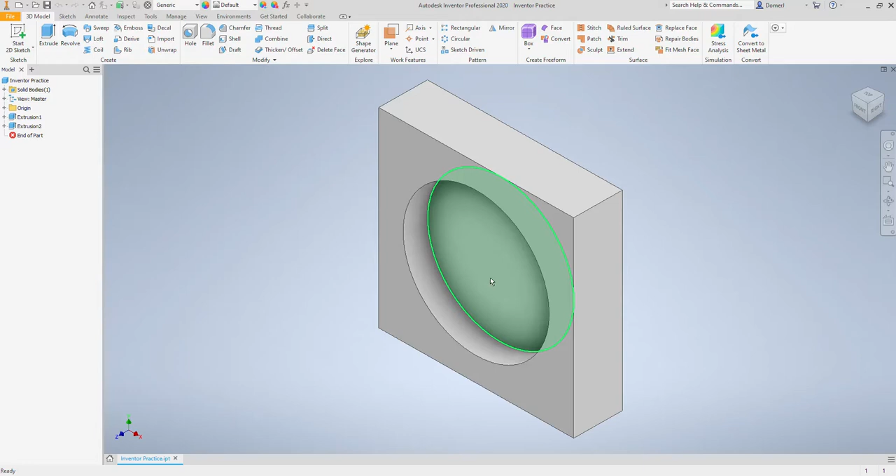Welcome back. Well, we're going to expand on our previous Autodesk Inventor introductory video, and in this video we are now going to draw the support file. So you can see up on my screen we've got the previous video's practice part. I went and renamed it Inventor Practice because obviously that was not the support. In the last video I saved it as support.

So once Inventor's open, whether you're continuing on or you're starting fresh, you want to get back to that Home tab here, and we're going to start a new part file. In here, we're going to draw the support. Well, we've already drawn it once, so this should be fairly easy. The difference, though, is we're going to draw it as a three-dimensional object now instead of its individual views. So we're drawing it like the isometric, but we're just looking at the part.

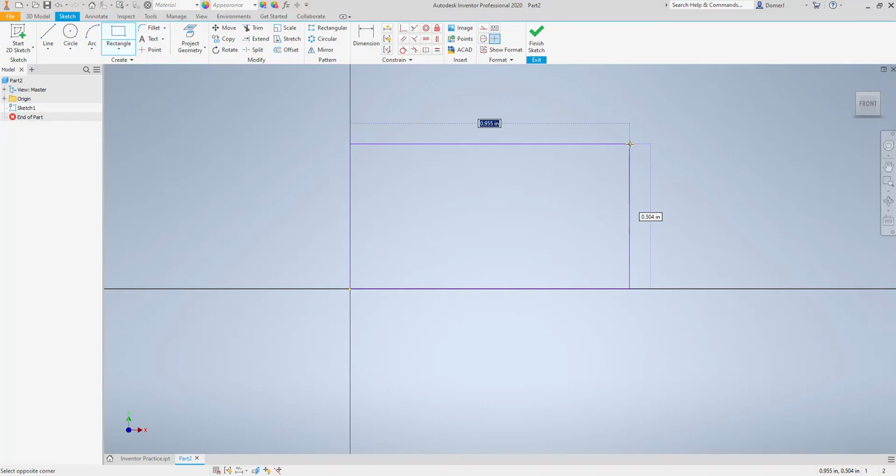So we're going to start a sketch on one of those planes. Again, I usually choose the front view, the XY, or the top view, XZ. I'm going to start by just drawing the block. I'm not going to try to draw all the details yet, so I've got a rectangle, and the support is, from the front view, 3 inches long by 1.5 inches tall. I've got the handout in front of me as I'm doing this. Hopefully you've got your handout there as well. And I'm going to extrude this the depth of the right side view of the support, 1.5 inches.

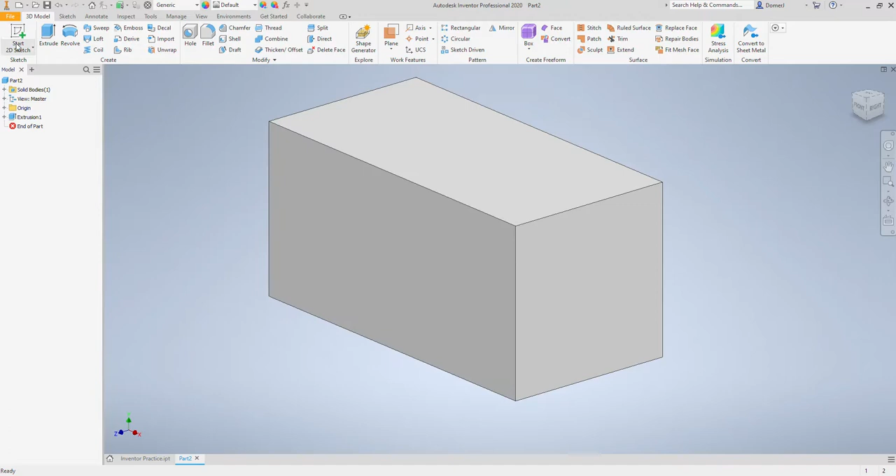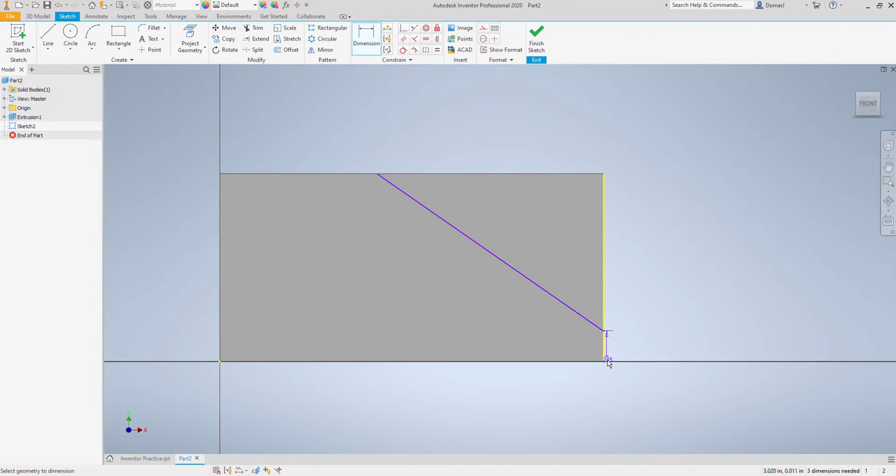So there's our object. I don't want to try to spin it around too much right now because I don't want to get lost in my orientation. This is going to be the front view over here for what I'm doing. So I'm going to go ahead and sketch on that, and I'm going to do my first cut. So I'm going to cut the big angle off. Well, that big angle is a 1/2 inch from there and 3/4 of an inch from the back side. So for right now I'm just drawing a line as long as it's on the object, and I'm going to dimension from this point to the bottom. Should be 0.375, not a 1/2 inch, my bad.

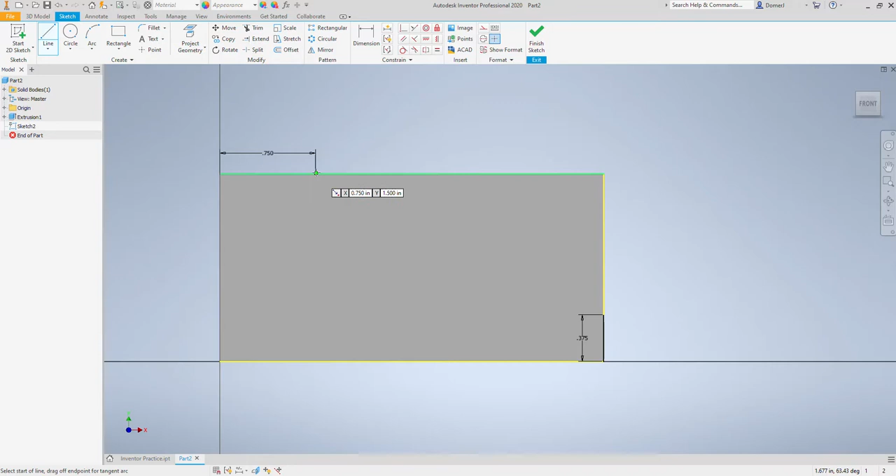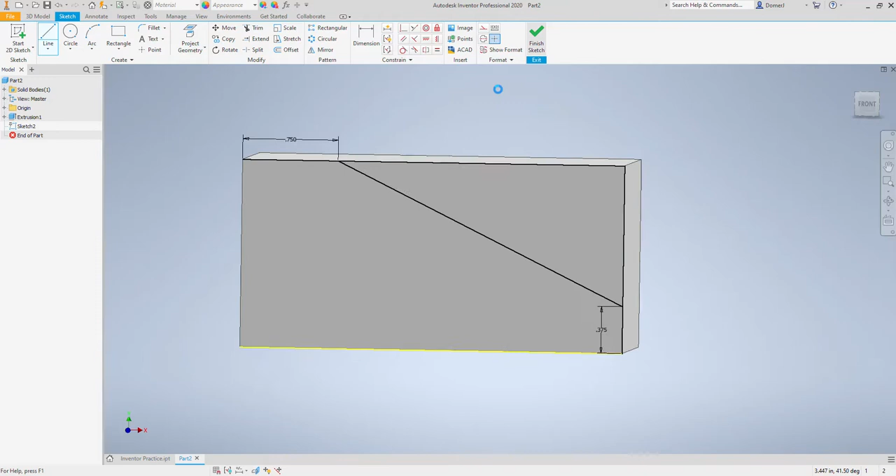And then from this point to here, and let's do this a little bit differently because it moved my line on me. Alright, so we're going to draw a line here, 0.75. Move away. Draw another line here, up 0.375. Now those lines don't move on me, so now I can draw a line connected to those dots, and that is that big angle cut. But in order for us to extrude something away, I want to get rid of this triangle. I have to make it a shape. Well, I can just simply come across here and finish off the triangle so that it is a closed shape. And finish sketch. I'm now going to extrude that shape, cut all. And we start to see that the support is coming together.

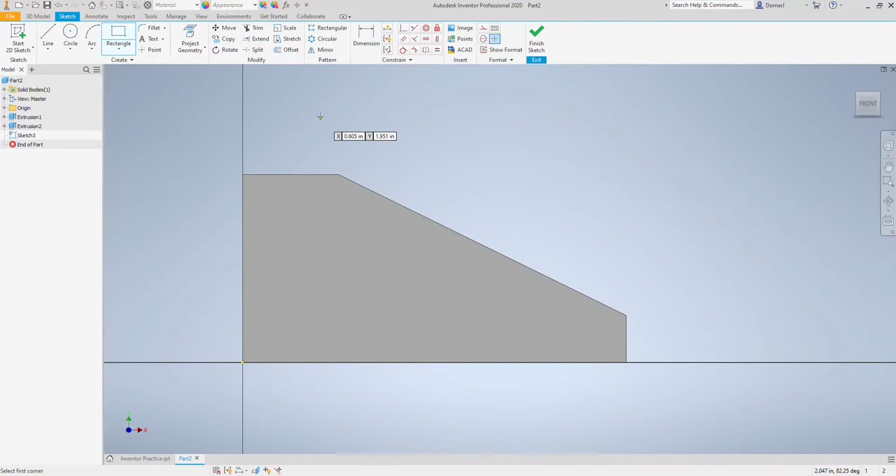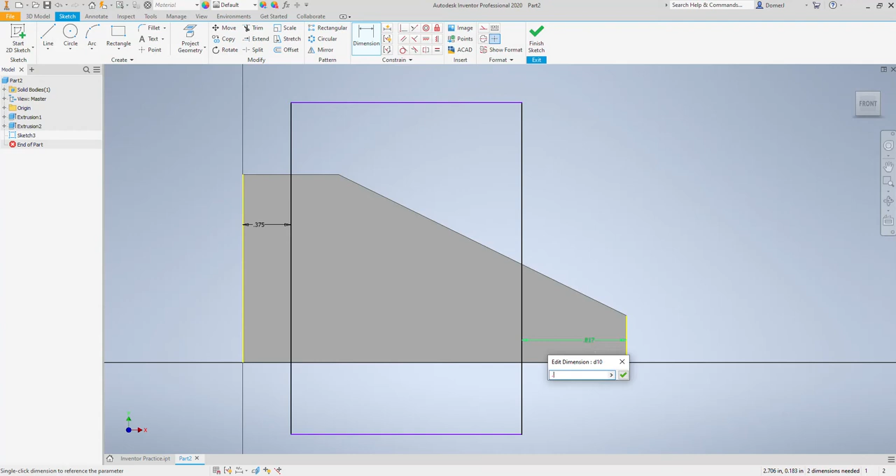I'm going to sketch in this front view again, and this time I want to do the cutout of the middle chunk area. So I'm just going to draw a rectangle, taller than what I need it to be, and I have no dimensions on there right now, and that's okay. I just drew a big rectangle on the page. I'm going to dimension this gap over here to be what it's supposed to be, 0.375 according to the handout. And I'm going to dimension this gap over here to be 0.75. I don't care about the height, it's just going to cut the part out. So finish, extrude, cut, and give it a distance. It's going halfway through the part, so 0.75.

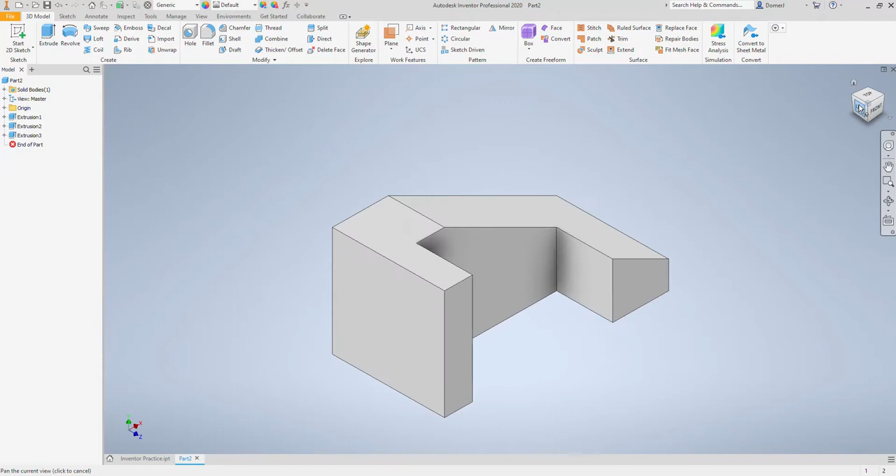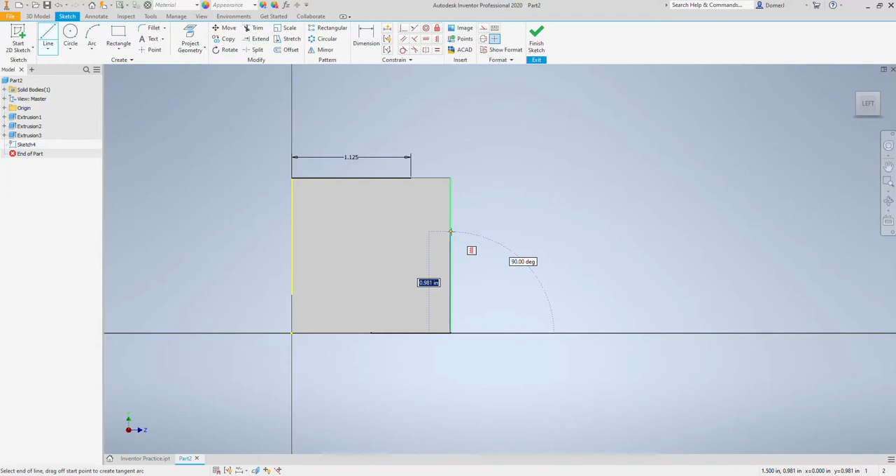Now we have to draw this little cutaway over here on this. I like to do that from the back side, just gives us practice to move it around a little bit. So sketch. And again, I want to draw those two lines. So this line coming over along the back is 1.125. You got to do a little bit of math in your head to figure that out. And this line coming up is 1.25. And then connect them to make my angled line and close it off to make a triangle. Finish sketch. And now from there I can extrude, cut all, and I have the support file.

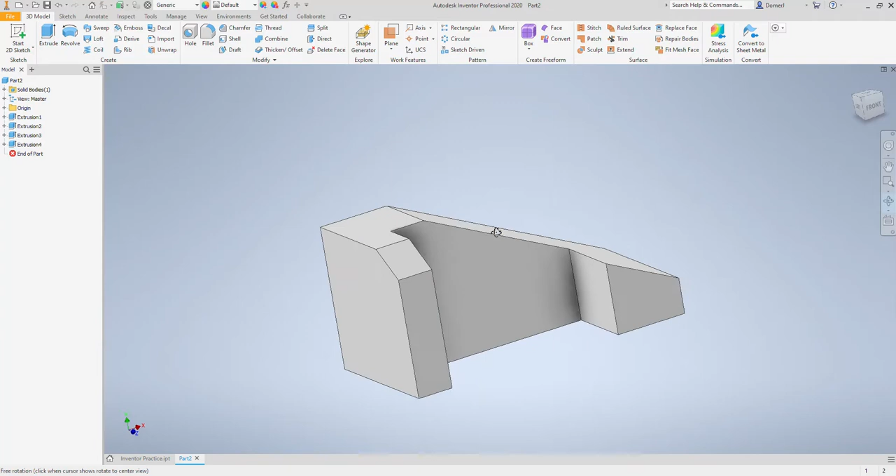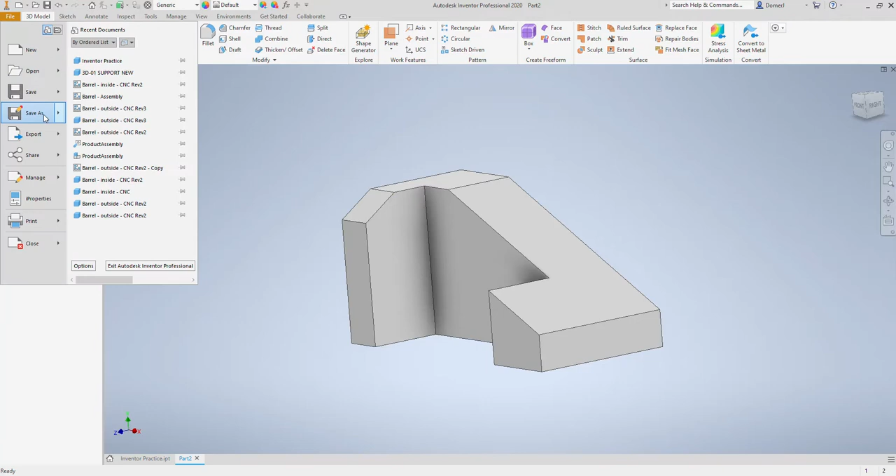In just a couple of steps we drew the original block, we did our cutout of the big angle, we did the cutout of the center slot, and we did the cutout of the triangle. Now there's many ways to draw this part and be correct in how you do it. So if you don't want to follow these exact steps, that's fine. But in the end, this is what it should look like. So we're going to go ahead and save this then, save as, and you're going to want to save it as support. I'm calling it new because I already have support in there, but 3D-01 support, save. Yes. And then for the assignment, if you're doing this for CAD class, you're going to upload that part file.

So if you go to your folders and where you saved it, classes, CAD, where did I put it? Wasn't paying attention. 3D-01 support new. So this file right here is what you're going to upload to Google Classroom. You're going to give me the actual CAD file. Maybe you want to put your name in it, in the file name, that's fine. It's a fairly small file. And then I can open it up in Inventor and make sure that it was all drawn correctly. So again, you'll be uploading that file in there.

So this short little video hopefully gave you some help. You can pause it, you can rewind it, you can replay it, but it gives you the 4 steps in drawing the support in Autodesk Inventor.